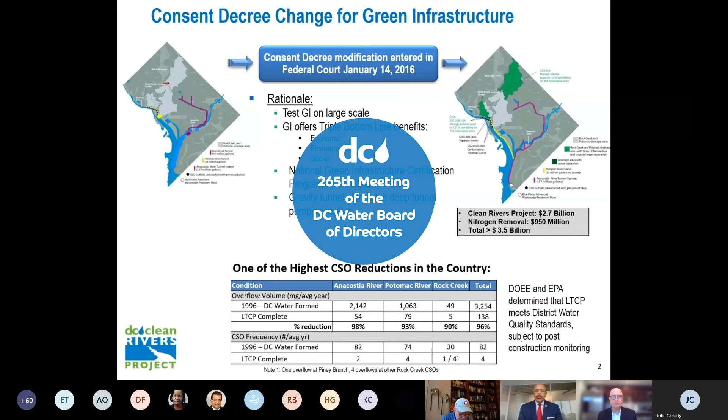Where are we? We're currently on schedule and budget. We're a multi-billion-dollar program, and there's not many places in the world that can say that. On the right-hand side there, that's a diagram of what we're currently building or what we built. Purple is what we've already constructed. Orange is what we're currently constructing, and yellow is either planning or design phase.

The purple line is 7 miles of tunnel, 23 foot in diameter, from Blue Plains up at RFK Stadium. That's been constructed and brought online back in March 20th of 2018. Our consent decree deadline, if y'all remember, was March 23rd, 2018, so we met it by 3 days. So every day and every hour is very, very important for Clean Rivers. We have really a tight time frame to build this program, and again, we've been doing marvelous so far.

We built that tunnel and brought it online in 2018, and since that time we've captured over 7.7 billion gallons of sewage that would have gone into the Anacostia. We've also caught nearly 3,700 tons of trash and solids, along with some organic material, that would have ended up in the Anacostia.

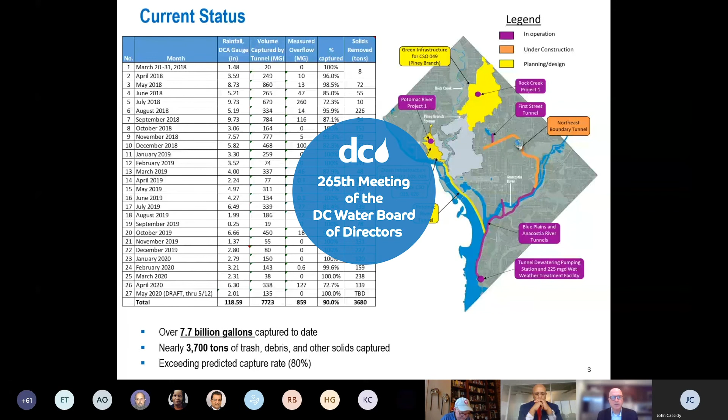You can see we're currently in the design phase for the Potomac Tunnel, and then the 2 yellow blobs that used to be green. Basically, those are the 2 projects we're going to talk about today: the practicability assessments of the 2 green infrastructure projects in those 2 areas.

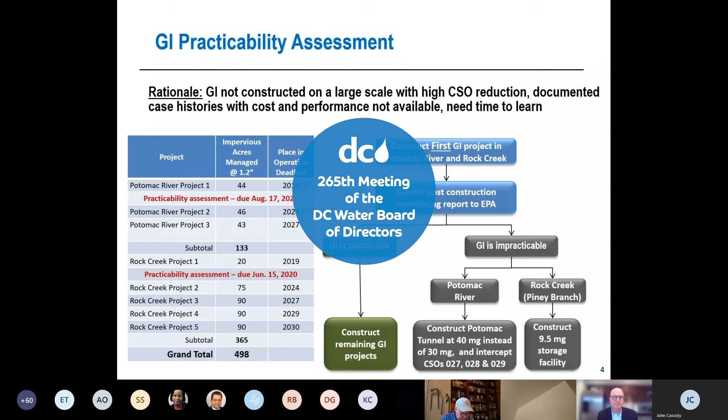There are other considerations in the federal consent decree amendment. Basically, we looked at constructability, operability, efficacy, public acceptability, and cost per impervious acre. They have 180 days once we submit this. The Rock Creek Practicability Assessment Report will be submitted June 15th of this year, and the due date for the Potomac is August 17th of this year. We plan to submit that before then.

An important aspect is that besides the green infrastructure we're constructing and the improvements we're doing in the combined area with the tunnels, DOEE and the district are also trying to improve water quality in the stormwater outlets and program areas outside the combined area. They have stormwater regulations passed a number of years ago that are trying to improve water quality in those areas, and those regulations were also passed for the combined area as well.

Those regulations were recognized back when we were negotiating the previous amendment in 2015, 2016, with the Department of Justice, because improvements were being made, like green roofs for schools, and improvements were being made for developments that were going in those areas.

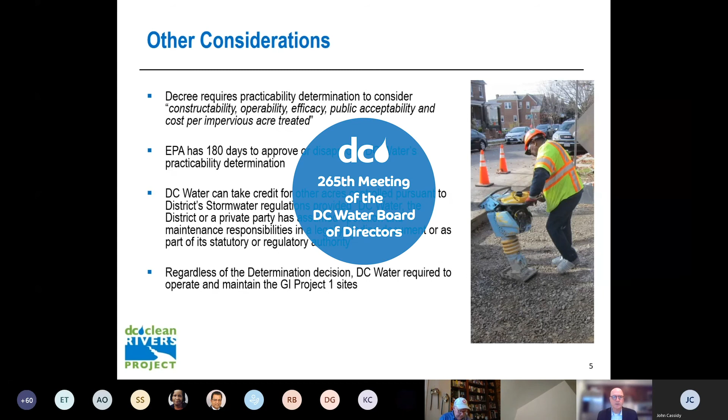And then finally, anything that we build, we're going to maintain from here to eternity. So our responsibility for any green infrastructure is just like for any water and sewer infrastructure - we maintain it from here to eternity. That's for the work that we do.

So I'd like to turn it over to Seth Charde, who's in charge of our green infrastructure program, to talk about the things that we've been working on over the last several years to make GI successful.

Seth: Good morning, can everyone hear me okay? Yes, okay great. So again, I'm Seth Charde, I'm the Senior Advisor for Green Infrastructure on DC Water's DC Clean Rivers project.

As Carlton mentioned, DC Water has significant experience and expertise in green infrastructure, going back as far as 2011, when we started a number of technical studies. Moving forward to today, we continue with our work in the field. This slide covers a snapshot of some of the various projects and programs we've been working on over the years.

Potomac River Project A, which was the first large-scale green infrastructure project on the Potomac sewer shed, as well as the Rock Creek Project A, the first large-scale green infrastructure project in the Rock Creek sewer shed, where we're managing over 20 impervious acres. The Alleypalooza partnership with DDOT, where we partnered with DDOT on their Alleypalooza program, where they reconstruct 8 alleys in each of the 8 wards on an annual basis.

We retrofitted just the portion that we needed to manage the stormwater, utilizing standardized details, standardized designs, and a blanket permit to drive down costs and drive efficiency.

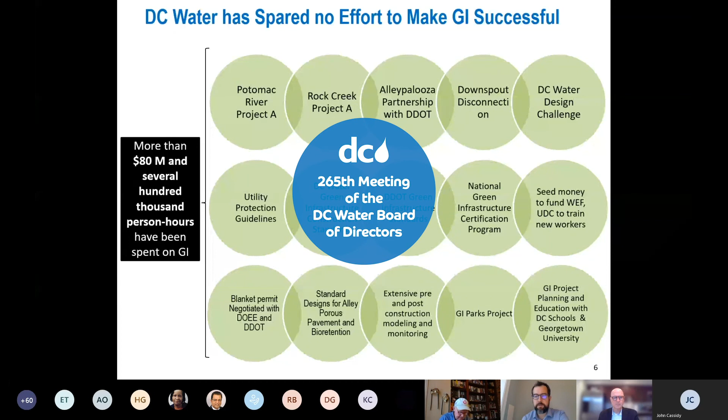And then again, this GI Parks project that came out of the design challenge, and various other planning and education projects and programs with various DC schools and Georgetown University. So we have a lot of expertise and experience in the field, and have confidence in our ability to be successful with green infrastructure.

So slide 7 gets into the practicability criteria and practicability assessment on Rock Creek. Carlton introduced the practicability assessment and the criteria that are in the consent decree. Those criteria are listed on the left-hand side of this table: constructability, public acceptance, efficacy, operability, and cost effectiveness, all straight out of the decree. We've added two other categories under 'other' for triple bottom line and economic benefits, and protection of future infrastructure, which is a GI MOU with the district.

Taking it from the top and going across, the constructability in Rock Creek is good. We know how to build these projects, and the contractors know how to build them. They didn't have a lot of experience when we started this program, but that's really changed over the years as green infrastructure has been constructed all over the city, both by us and agencies and private developers and homeowners. So the contractors know how to build it, and the assessment there is very good.

Moving into public acceptance, the assessment is also good. We ran a survey in the Rock Creek and Potomac GI areas after we built the projects. This was a pretty extensive survey, over 30 questions. One of the main takeaways is that 64% of the residents would like to see more green infrastructure in their neighborhood.

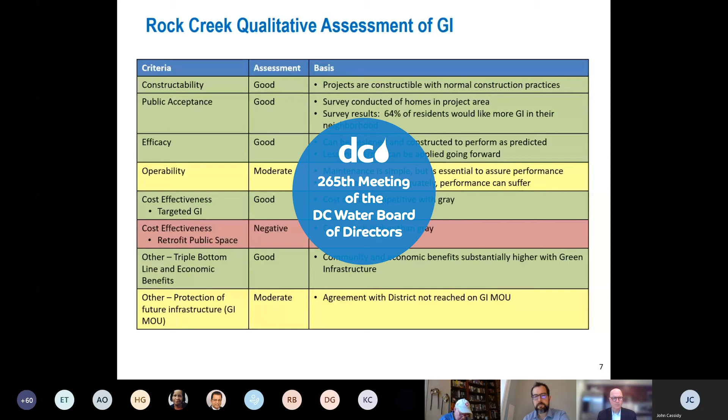Alternative 1 is the all gray approach that Carlton highlighted in that decision tree or flow diagram earlier in the presentation. Alternative 2 is the all green approach, again out of that decision tree, which is 365 acres of green infrastructure. Alternative 3 is this hybrid approach, and this is actually the approach that we're recommending.

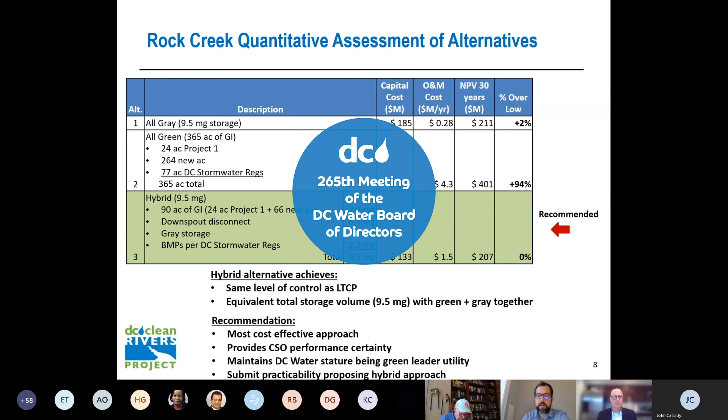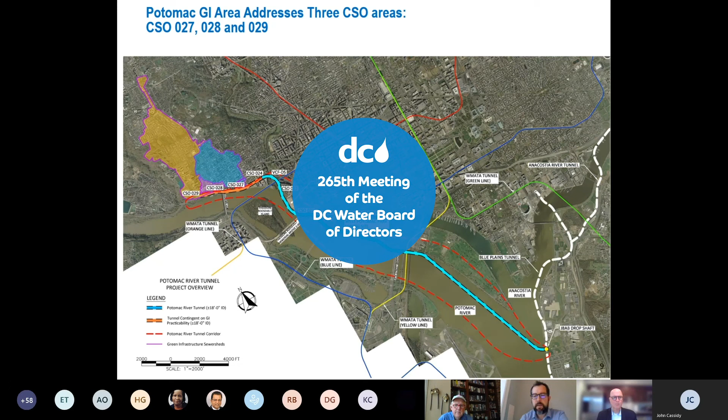When we look at the constructability criteria, unfortunately the assessment on the Potomac side is negative. That's really being driven by limited space in the Georgetown area and the historic Georgetown area. Conditions are very tight. Many of the streets don't have a planting strip that we could use for bioretention. Parking conditions are tight, the streets are narrow, the alleys are narrow. So it's just much more difficult to build green infrastructure in general within that historic district that correlates with the combined sewer areas 27 and 28.

On the public acceptance side, I'll note that we had positive reception from residents for the first project, Project A, in the Potomac up in Glover Park and Burleith. But again, as you shift down into CSOs 27 and 28, correlating with the historic district, we've seen significant opposition from the U.S. Commission of Fine Arts, the Old Georgetown Board, National Capital Planning Commission, and so on. So it's very difficult to move ahead with green infrastructure in that historic district based on the pushback from those agencies.

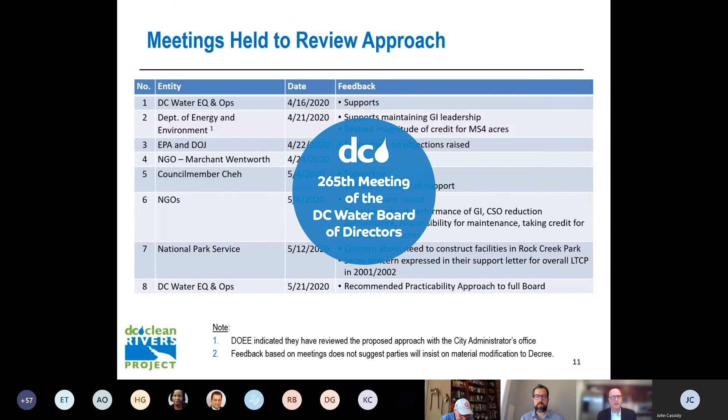Good. Okay, let's continue on. On the NGO meeting, the May 6th list, we invited folks who initially sued us back in '99, as well as a number of other NGOs, environmental organizations. You can see a large number of folks.

Again, lots of good feedback, lots of good questions about it. General support of Clean Rivers and the work that we've been doing on the Anacostia. And again, once we submit the report, we'll provide a link so everybody can have access to it. So if there's any other questions about it, we can answer. But the bottom line here is it was a very, very good, productive meeting that we had with the environmental organizations on May 6th.

Continue on. So the recommended approach, this is really basically a non-joint use issue. This is DC only water, only DC or district residents discharge into this basin. So for the Rock Creek GI and the Rock Creek solution, this will be all picked up, the cost will be picked up by district ratepayers. This won't be shared with the suburbs on this one.

So basically, their approach, again, you can see what Seth had laid out there, GI, the gray approach, the green approach, or the hybrid approach. And again, our suggestion is this hybrid approach. We're basically using the best of both worlds of gray and green and putting those together to come up with this hybrid approach. We're reducing the amount of risk from the standpoint of green infrastructure, the amount of green infrastructure we're constructing. That helps us reduce the long-term risk for green infrastructure that we have to build and maintain, and any interactions we have with the district with a less amount of green infrastructure that we're constructing.

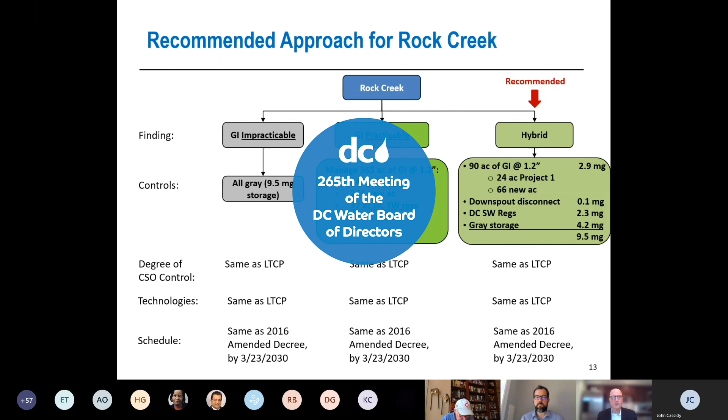Our next steps: we're going to have a webinar on June 11th - that was tentative, but I think that's almost set in stone now. The goal is to submit the reports on June 15th, 2020. They have 180 days to approve it, and our goal is to have this completed sometime in the fall or early winter of 2020 or 2021. So we'll be hustling, they're hustling - DOJ and EPA and everybody seems to want to push this along because lots of folks think it's a good idea. The goal is to have this all completed before the first of the year, or right around the first of the year 2021.

So with that, any questions I can answer, or Seth or John Cassidy?

This is Floyd Holt, I have a couple of comments. Let me preface by saying it's a very impressive and well thought out strategy. Similar to the county, we're engaged in an urban retrofit and stormwater management strategy to convert over 6,200 acres, so we understand the complexity of the process.